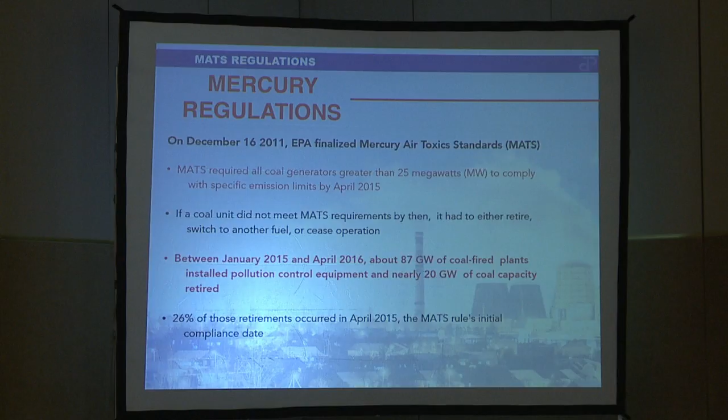What happened was that if at a time some plants were not able to comply with that regulation, they would either need to retire or change the fuel, or in the majority of cases, change the strategy and implement new APCD, as we'll see in the next slide.

So the majority of the plants either changed strategy to get more APCDs, air pollution control devices, or would have to retire. What happened at the moment was that at the implementation in April 15, 2015, plants applied for an extension, which allowed for an extra year that has already passed. So everyone right now who's above 25 megawatts producing power with coal is enforced to comply.

According to the EIA, this made quite a bit of closures estimated that they attribute to MATS. So there's definitely been an expense on plants and closures due to this regulation. I guess our main goal here is to provide solutions that would cut the costs to comply with these regulations. So can we go to the next slide?

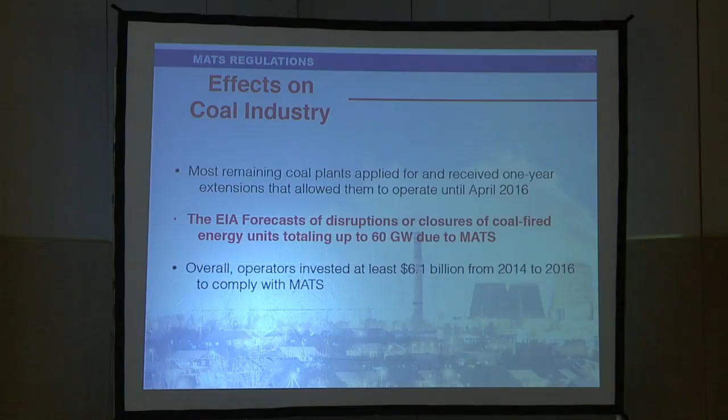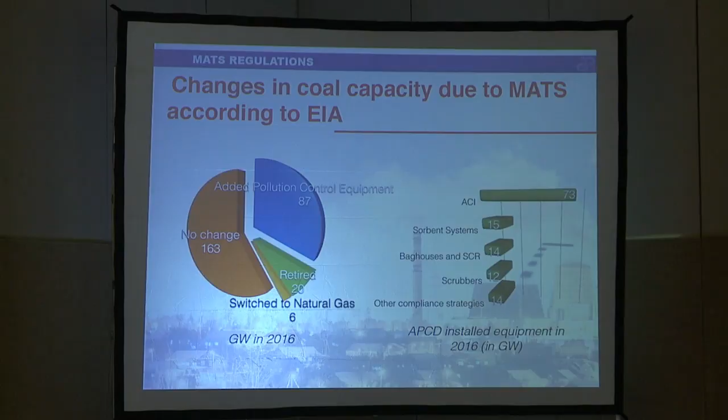Thank you. So these are the direct effects on the coal industry of the Mercury Air Toxics Standards. As we can see, the majority of the plants either would have no change because they already had the air pollution control devices implemented. But on the other hand, there's quite a bit, as you can see on the graph on the right, that would implement activated carbon injection systems.

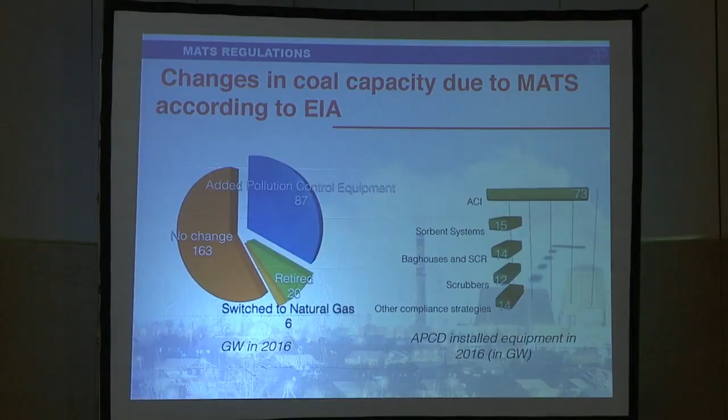Just to explain, this graph is expressed in gigawatts, the amount that have either implemented air pollution control devices, activated carbon injection, or other injection systems that would control mercury emissions. So just to briefly summarize, there's an economic impact in the coal industry based off of MATS. Let's go to the next slide.

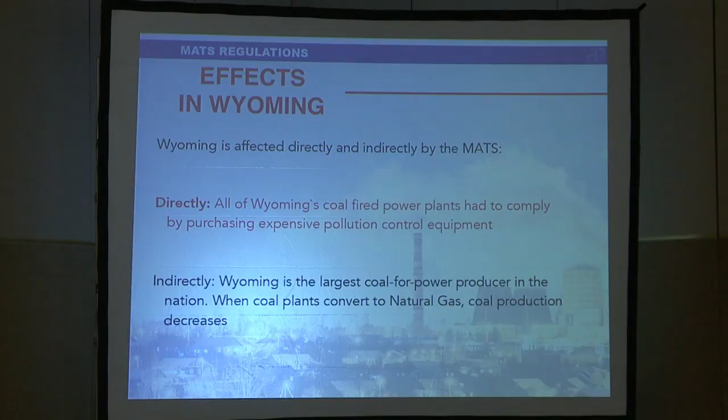Okay, and Wyoming, being clearly the biggest coal producer in the nation, has suffered a big toll on this, either due to power generation, or simply because coal is not going to be used as much, mainly because of the CO2 regulations, but also of course due to MATS. So we want to tackle that problem in a manner that's efficient and lean, mainly. That's how we came up with the process that I'm going to describe very briefly soon. Let's go to the next one.

Okay, so we are Pollution Control Technologies. We were founded in 2013, headquartered in Laramie, Wyoming. Initially started as a research and development company, we're still developing quite a bit of products, mainly XFA, which is our target and what we'll discuss here. We have an active research lab where we do quite a bit of chemistry, characterize sorbents, develop new controls for CO2 and mercury, and our process is currently funded by a federal contract.

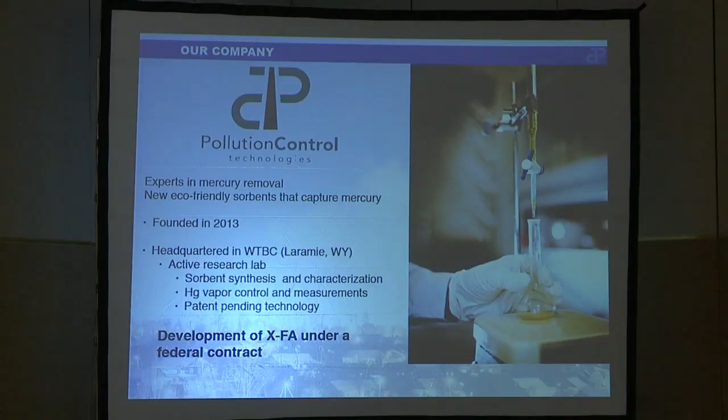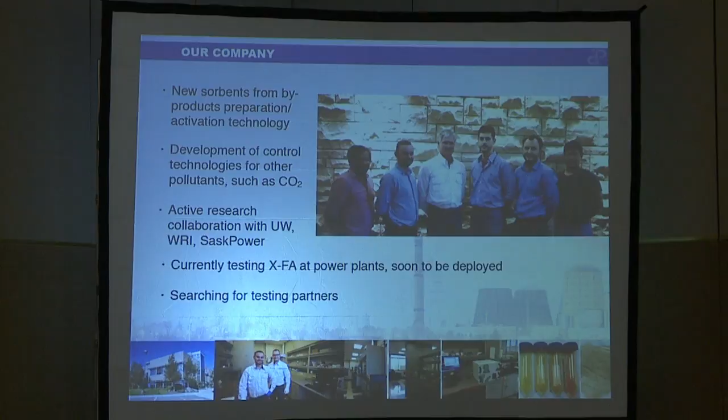That's our team. And as I said, we're developing other technologies to control carbon dioxide. We're working with the University of Wyoming, the Western Research Institute, and currently with SaskPower, which will allow us to test our sorbent technologies.

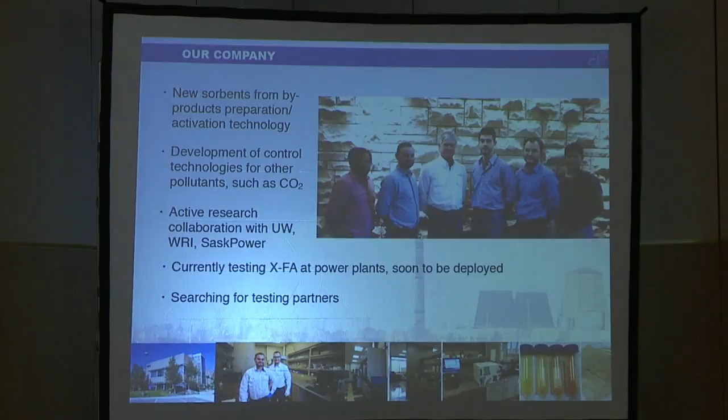Our sorbent is based off of the byproducts of the plant, and I'll show you in a minute how this operates. So to talk briefly about why we're here, we're mainly going to talk about this process, which is called XFA.

XFA is a sorbent produced based off of fly ash. If you're familiar with the process from a power plant, the byproduct is ash. So we're basically using things that are already at the plant to reduce the amount of energy required to control an emission. Right now, the current suite of technologies used to control mercury emissions is activated carbon and other technologies in place. Now, activated carbon requires coal mining and activation of the coal, which requires quite a bit of energy.

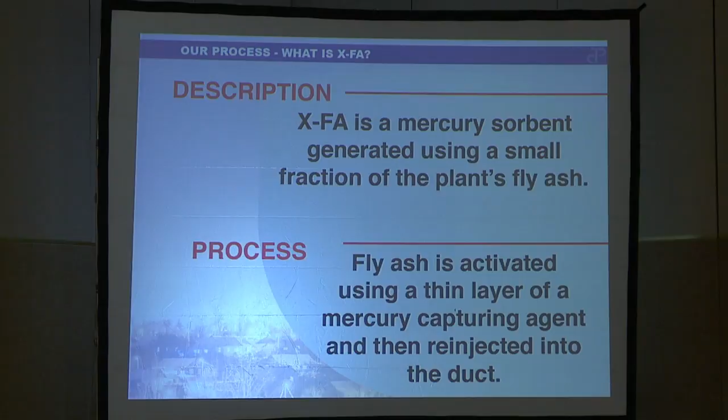Our process differs from them in the sense that we're using the byproduct of the plant, which is ash, and we're activating it using a thin layer of an activator that goes around the surface of the ash and captures mercury. Can we go to the next slide, please?

So the main difference with this process and other ones is that we believe it's a very lean process that does not use much energy. It has a very, very small footprint.

The whole process, since it's an on-site process, utilizes a mixer connected to the plant, in the sense that ash or the byproduct comes out of the storage of ash, goes into an activating station, and occupies a space of only 6 by 6 by 6. The ash gets into our activation station, gets mixed with a solid activator, and coats the ash. This requires a very low amount of energy, mainly 2 to 5 horsepower, even for a very large plant.

So that is a very small size, quite like that of an office at a plant. This constitutes a very fast and highly efficient coating process, which produces no byproducts and does not generate any waste. Let's go to the next one.

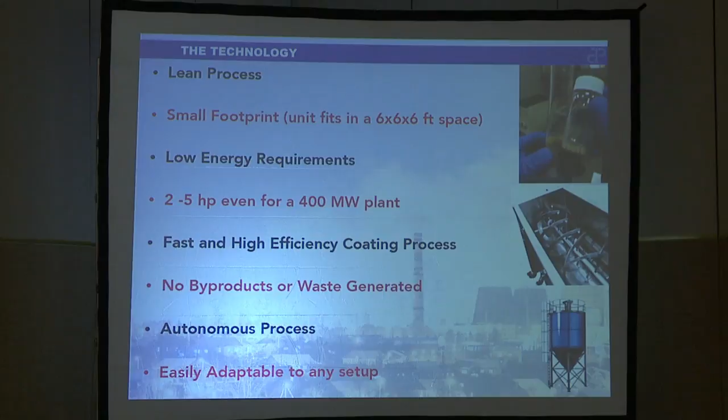Okay, so basically how do we do this? Out of all the production of ash, we take only a stream of 1% of the production, and we coat that with 1% of the activator. So basically the laden ash, or the waste ash, only has 0.01% of activator on top of that.

So that means the ash is not affected. It does not lose any of its properties. So for plants who actually sell ash to cement operators, there is no change. There is no interaction with air pollution control devices or materials that we've found.

We've tested with ash that goes through different devices such as wet FGDs with SDAs, and the ash has had no problem. That means we were also able to pass the different leaching tests and preserve ash for resale to cement operators. So those are some of the advantages of the process. Can we go to the next one? I just want to show the next one, and then we'll go back to this.

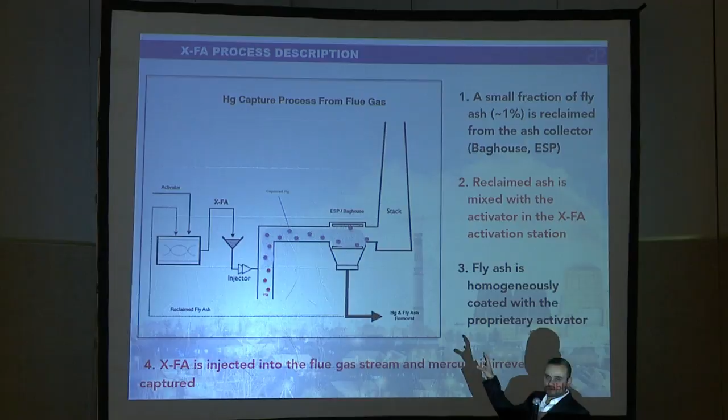So basically what I wanted to show is the process here. What you need in a process like this is a source of the byproduct available that will go into the station, where we have a low energy mixer, which for the size of a plant is a very, very small mixer. It gets mixed with an activator, a proprietary activator, which is the whole patent-pending process. That creates a thin layer over a very short period of time, about 20 to 30 minutes, and then that goes re-injected into the flue gas stream.

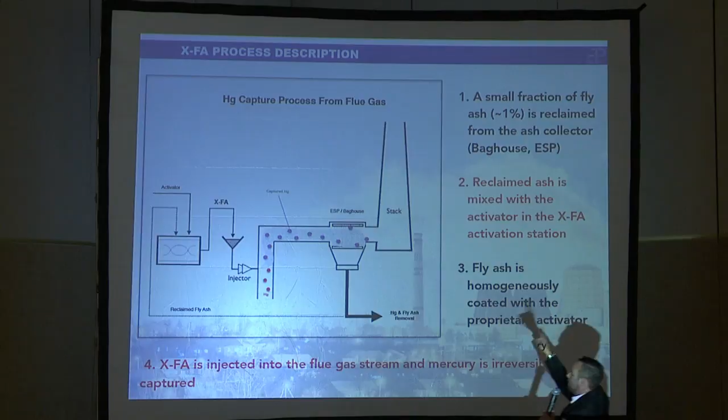The new ash, which constitutes 1% of the weight of the ash, traps all the mercury, and as you see here at the very end of the process, there is no mercury coming out.

So we have the laden ash with mercury interlocked with waste ash, and there are no byproducts, and it's an irreversible capture. So we have shown leaching capable, passing the leaching tests and still keeping the mercury on site.

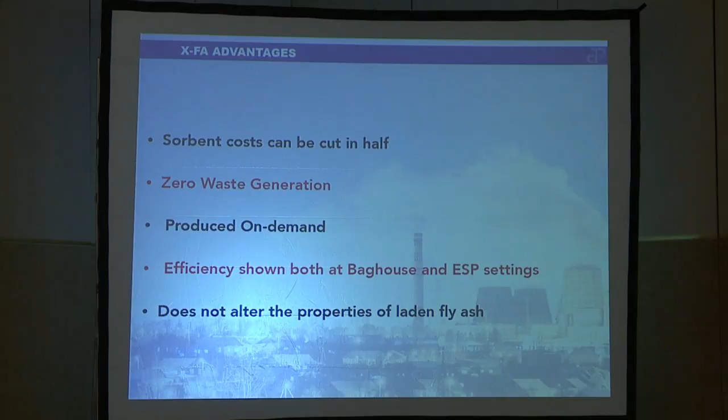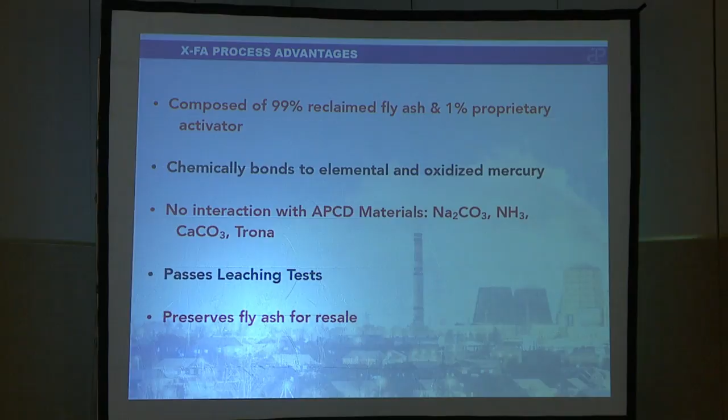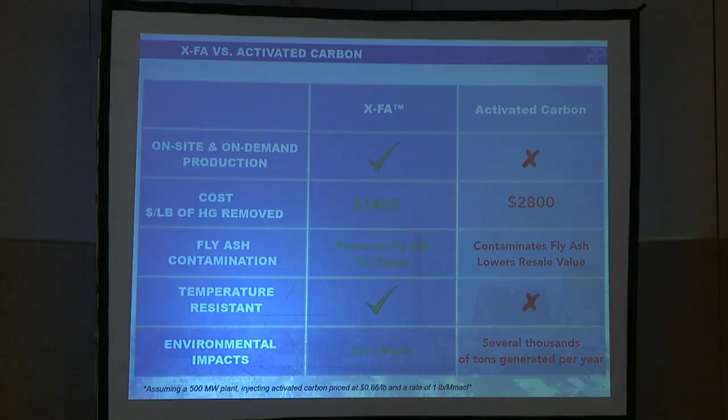Okay, so here are the outcomes of our research. This is what we obtained. We noticed that by trying this product at different settings, especially in a pilot plant facility, we were able to achieve the same capture of mercury at $1,400 versus $2,800 with activated carbon. That's also scaled and calculated for a 500 megawatt plant, injecting activated carbon at a common cost of about 90 cents per pound.

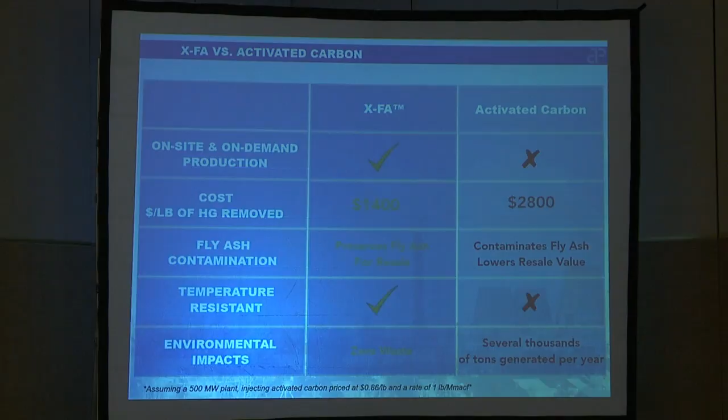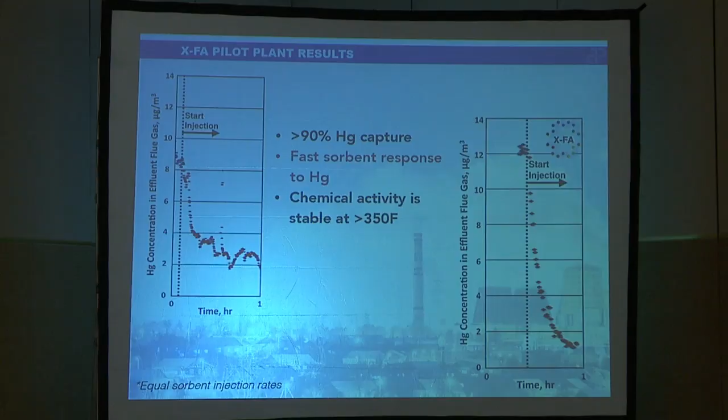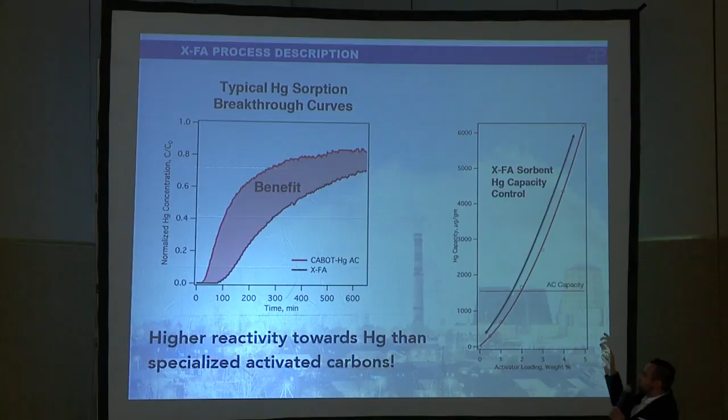On the graph on the right, we show that we can tune our product to have more or less reactivity depending on the needs of the plant. That's a difference we have, because our product is produced on site, so the amount of activator we add depends on what's needed. The points on this line show different sorbents we had and the total amount of mercury that could be uptaken by each sorbent, whereas the red line refers to activated carbon. Our sorbent could be tuned to the necessity of the plant and achieve much more capture depending on what we want to do.

So basically, this is the technology we're running. We're looking right now for different testing partners, which is part of the reason we came here as well. We have been able to work with different power plants such as Sask Power in Canada, and right now we're also trying to implement a test plan with PacifiCorp and different power plants around the nation. So basically that is the goal of our technology at this moment. I don't know if anyone has any questions about this?

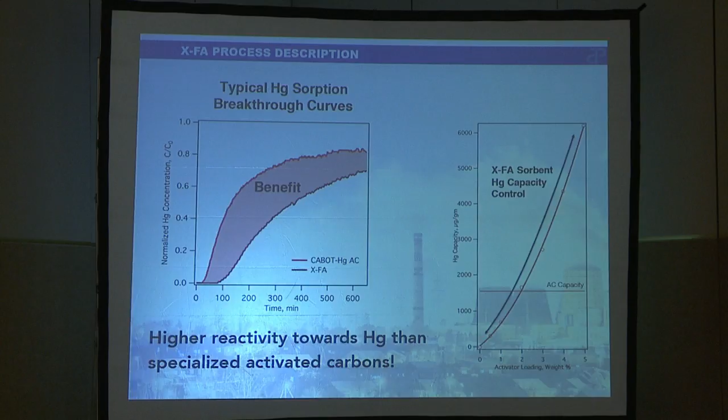Very interesting. Can you go back and talk a little bit about when you say there's no waste product? What that actually means, because it looks like there is still some - I mean, you're going to have the mercury removed from the process. So if you could talk through what happens at the end with how much mercury is still being released versus how much is removed, and then what do you do with that stuff you've removed?

So basically, the goal when you inject a sorbent is to comply with the regulation, right? Let me give you an example. An arbitrary number for native coal, let's say, is 10 - the number is 10 micrograms per meter cube for a PRB, as an average number. Now, when you inject, what you're trying to reduce is to the level of compliance, let's say it's 80% of the reduction to meet MATS regulation. So you'll still emit as much as it's permitted by MATS - that number I gave before, which is 1.2 pounds per trillion BTU. So that's what will come out. You can reduce all the way to zero, but it'll be more expensive, so plants normally reduce all the way to compliance limit. So you'll inject as much as you need to comply with MATS.

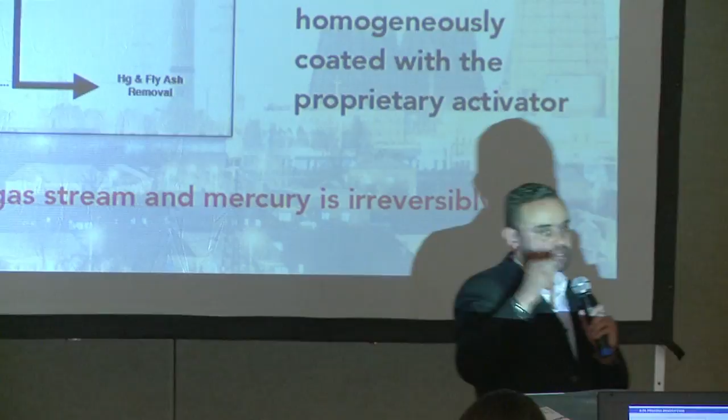And then mercury that's in the laden ash, what's loaded with XFA, will come out in the byproduct - so here, in this stream. So basically, where you remove ash, that's where mercury will be trapped, interlocked, just as you do currently. That's what the current technology does - they inject either dry sorbents or activated carbon, and that will go into the stream, capture mercury, and then deposit into the final ash. And so long as it's locked well enough that it won't leach out, then you are under compliance. So then it remains in the final ash, but it's basically isolated and locked in, so it can't leach.

And Adolfo, maybe just clarify for some of the folks - typical activated carbon changes the fly ash, so it diminishes its value for using in cement production, its resale value. Can you talk about how I believe your technology doesn't have that same effect on the fly ash and therefore doesn't diminish its value for cement production?

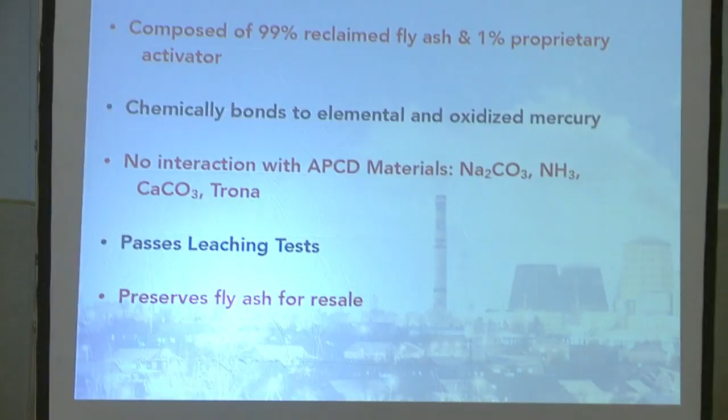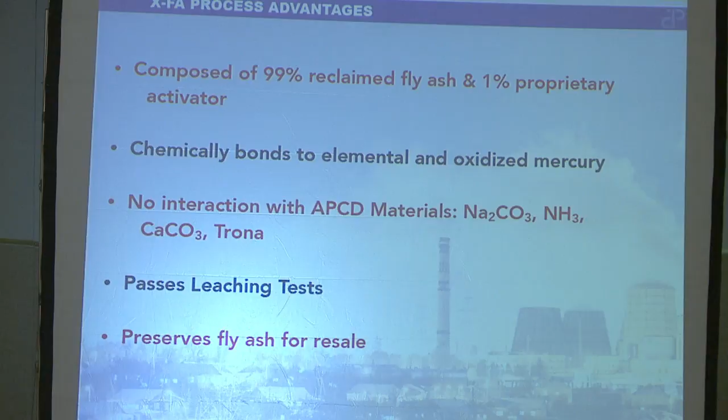Absolutely. So, mainly one of the things I was mentioning - let me go to a different slide here. Okay, so as I said before, the product itself, what's introduced into the activating station, has 1% of an activator. That is the product that we use to capture mercury. However, the total amount of ash that we use to produce that product, the XFA, is 1%. So we're talking 1% of the 1% is the amount of activator that's present on the final ash - so 0.01% to 0.04%, which is a total amount that's very, very small compared to, for example, the amount of activated carbon you would inject, which, by the way, has a property that can uptake air entraining agents for a concrete process. If you wanted to sell it to a cement plant, this would not happen with our activator because it wouldn't have that property to start with.

And secondly, on a mass basis, you're using a lot less of the activator. Regardless of the amount of XFA that you'd be injecting, the total amount of activator present in the final waste is almost negligible. So this does not change, on any mass or volume basis, the properties of the ash if you wanted to sell it to a cement operator. That's why there's a big distinction there, not only on a mass basis, but also on a chemical basis, because our activator is not based off of activated carbon. It's not the same - it won't uptake, say, what you use in a concrete production, which are air entraining agents.

Questions from audience?